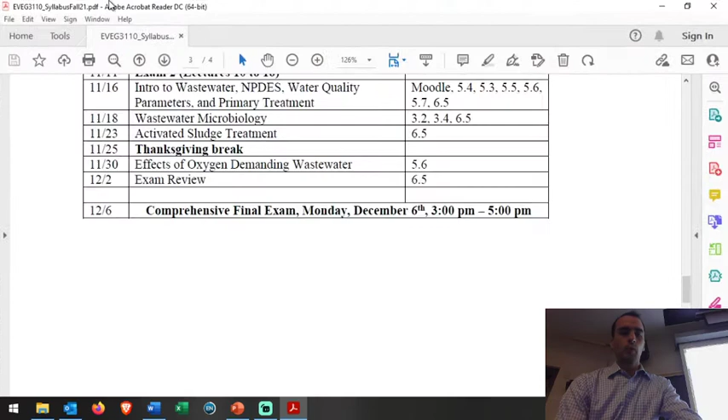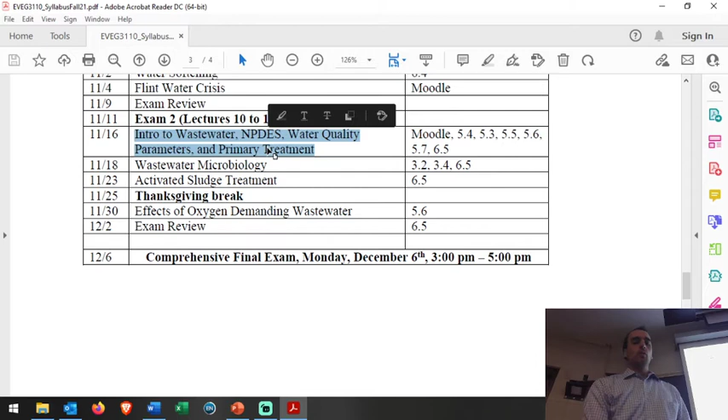My plan for the rest of the semester was to today really go through some of the regulatory framework. My history is I worked 6 months as a permit writer for Michigan's Department of Environmental Quality right after I finished graduate school, and so I have a little bit of experience to share with that regard, spice it up a little bit, I hope. And then we'll get into wastewater microbiology. You probably already have touched on that, and get into kind of the essentials of wastewater treatment driven by microbiology, and then talk about how biological oxygen demand goes.

That's my plan, and it matches reasonably well with what I've seen from the final exam. Like I said, I'm going to be trying to add and adapt a little bit as we go. Okay, any questions or concerns so far?

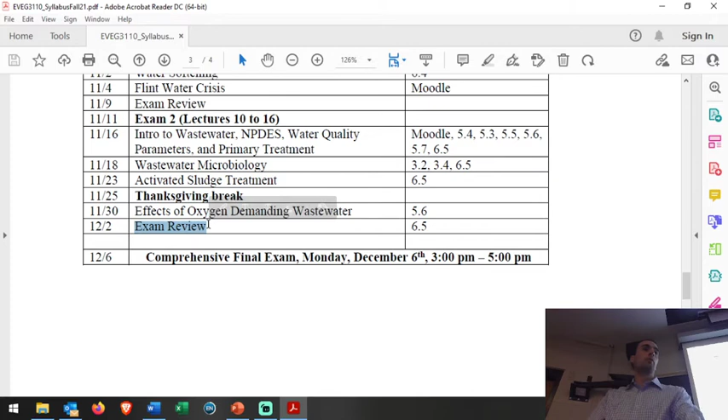We're going to have homeworks, right? So yes, I'll probably assign one homework, and that would be due. My plan generically would be to have it due this date and go over the solutions with you for that homework and answer any questions in prep for the exam.

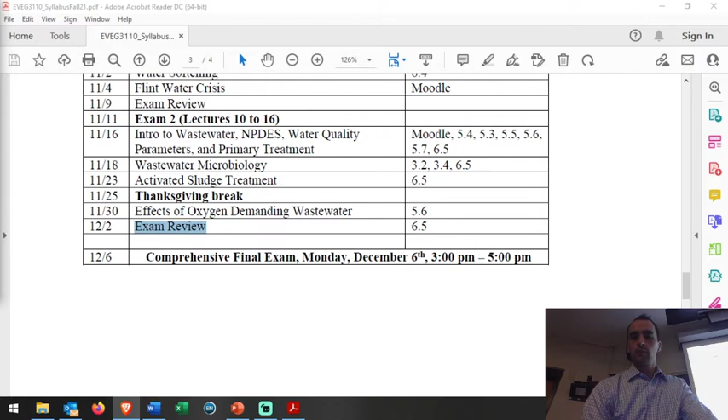So let me just show you real quick. We'll have a little bit of inception here. If you were to go to twitch.tv/snowslab, you'll see a few seconds delayed right here, okay? And so if you wanted to chat to me, I think you need to log in, but there should be a way to chat.

I'm not going to bother doing that, but if you do sign in, then you can chat to me. So if you stay out because you're sick, I'll be watching that, and I'll be able to answer questions you put live. I'll write that up on the board in a moment. It's twitch.tv/snowslab.

The lectures will stay there for about 10 days, I think. I do download those for my other classes and upload them to Moodle. Since I don't have Moodle yet, I'll probably just leave them there. So if you need them within 10 days, they'll be there. If I do get Moodle, or if you ask me, I can send you a link to basically the equivalent lecture in particular. But you can always go here within the past 10 days and find that. I'll probably write that somewhere else for you later if you need.

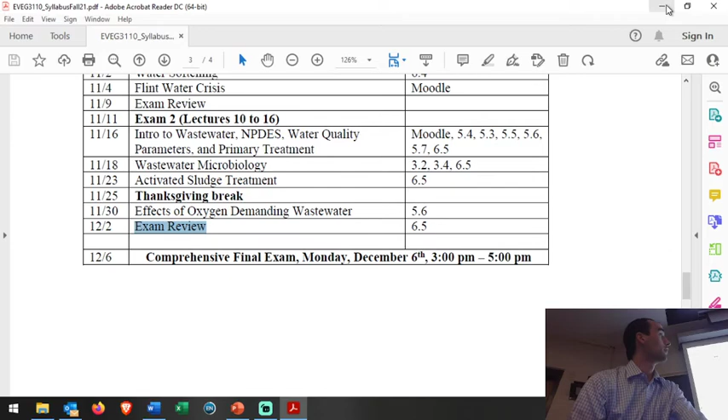Okay, so with that, that's kind of my approach here. Let me bring my screen back to myself. All right, any questions or concerns before we get started?

Were your notes, I'm not sure if it says, you uploaded or? If I get access to Moodle, I will definitely upload my annotated notes for you. What I'm going to do in class is I've got a little writing pad and pen, and I'll be writing on the pages. If I'm able to, I will definitely upload those for you.

If not, you can go to the Twitch page and you'll see the screen, right? You see the little webcam picture, that's where my face is going to be. I just put that there as a placeholder while I prepare my slides. Okay, so you'll have access to that. Any other questions, concerns?

All right, so we've probably talked a lot about disinfection at this point, I would assume. One of the things we can take a look at is the rate of typhoid fever in the US. Chlorination really started around 1910, though of course it wasn't implemented fully. And when we did begin chlorinating, that's going to help a lot with our food and waterborne disease.

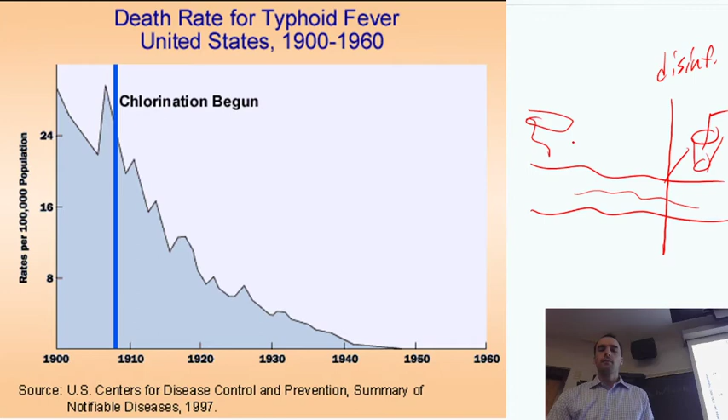The second barrier is for when we have, let's say, a poorly drawn toilet here, and flushing, and it escapes into the river, or wherever your water is. So the idea for wastewater is to have that second barrier. Disinfection may be the primary barrier, the water treatment, but the wastewater treatment is that second barrier. Ultimately, what we're trying to do is mitigate, prevent the fecal to oral route of transmission. If you haven't heard that term, it's pretty nasty, but essentially that's what's going on.

By the way, if you get pink eye, it's kind of the same deal. It's some sort of bacteria that likes to grow in warm-blooded animal guts or similar environments that's now growing in your eye. So maybe you went swimming and the water was kind of dirty, or something like that.

Antibiotics are typically what you need to clear out pink eye. That's kind of the deal. You don't want gut bacteria in the wrong place, right? And if you give it the opportunity and there's nutrients to grow, it may grow and be an infection if it's in the wrong place. Typhoid fever is the same deal. It's a pretty bad disease if you get it, but fortunately it's something we can deal with pretty well with proper engineering and infrastructure.

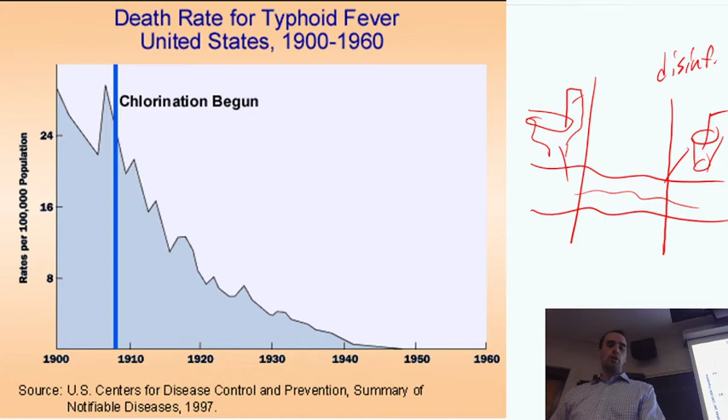So thinking about wastewater sources, we have industry and municipal, and the different types of toxins, the different types of contaminants we want to deal with really depend on where they're coming from. On the drinking water treatment side, you have to consider what source you're using. Then on the wastewater side, once you've sent that along through industry or homes, what kinds of wastewater are you dealing with? A lot of industries have wastewater nasty enough that they can't send it to a municipal treatment facility, or at least not without pre-treatment.

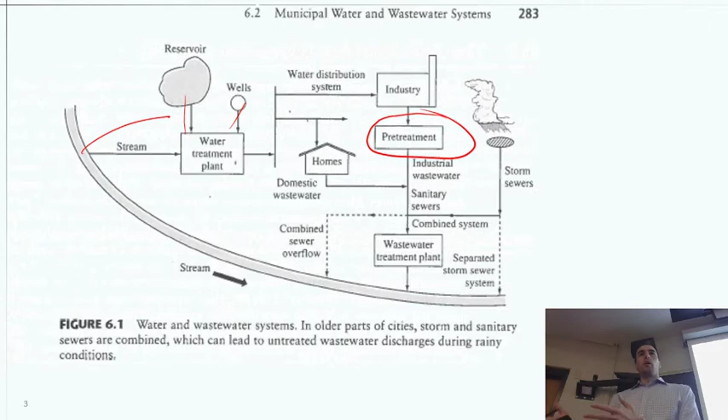Most wastewater treatment plants municipally are designed to handle the wastewater coming from homes. There's also an issue you may have heard of, storm and sanitary sewers. We didn't always separate our wastewater stream sewers from our stormwater sewers. Stormwater is a big important thing, we know it here very clearly in Louisiana. It storms a lot, we need a place for the water to go. A lot of municipalities, when building their infrastructure originally, just sent that down to the sewer system because it was kind of dirty water, and maybe that would be a good place for it to go. It's a bad idea because then you're going to flood all the wastewater back out if you have a bad storm flood event. So nowadays pretty much everybody's trying to separate their storm sewer systems, if they're not already separated.

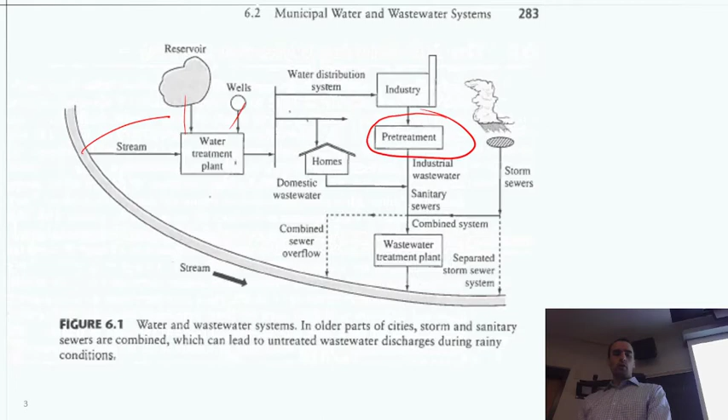Okay, so that's sort of the big picture schematic. Another big picture schematic for a typical treatment process - you probably touched on this already, and we'll go into more depth in a bit, so I'm going to breeze a little quicker through this. We've got primary treatment, which would essentially be the removal of the large debris, the grit, the stuff that might harm the plumbing, and whatever can settle in one session of a sedimentation chamber.

From there, we have secondary treatment, which comprises almost always some sort of bioreactor. So we employ biology, employ microbes to chew up the digestible stuff and make a lot of cells.

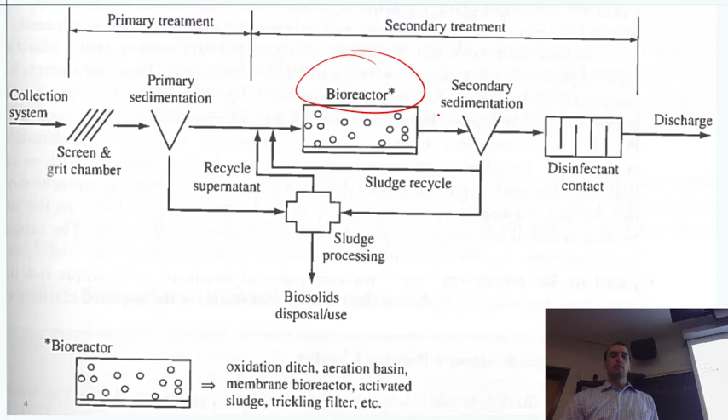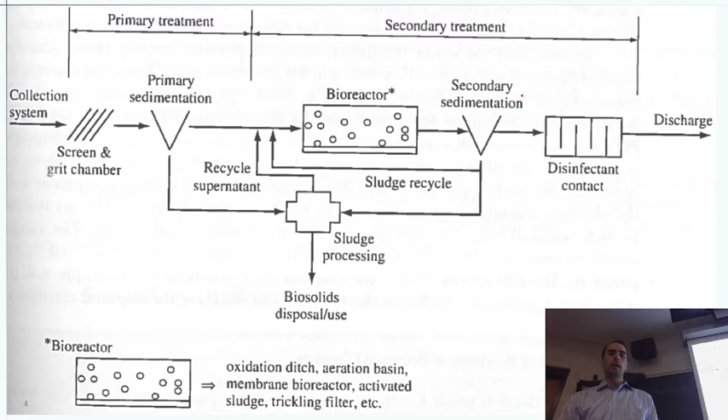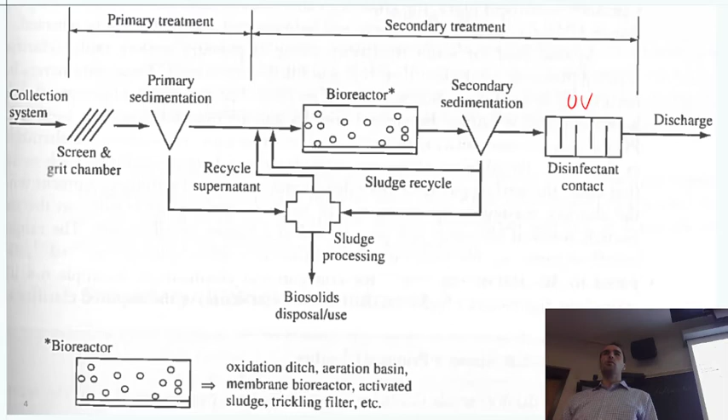Then we can separate the cells. That's going to be in sedimentation or potentially a membrane for a membrane bioreactor, or some other clever way to keep those bacteria in the bioreactor. So either we are recycling that sludge or using a membrane to keep it in. And then finally, we don't want to discharge all those bacteria into the wild, so we've got to disinfect it at that point. A lot of times that's going to be ultraviolet light. Sometimes it's chlorine, but then you have to remove the chlorine because you don't want to discharge chlorine into a river or wherever. So, lots to consider in that regard.

Part of all this is the sludge processing. Well, I say part of - it's not typically counted as secondary treatment. What we're talking about with secondary treatment is really the water component, but the solids that are produced in all of this are also important. It's a potentially beneficial resource. There's lots of nutrients bound up in those bacteria cells and all the other junk that accumulates. So if we treat it properly, there is an ability to use it as fertilizer. We call that application of biosolids.

There are different classes of biosolids based on what kind of processing they received, what temperature they achieved. We essentially let the biological activity in these sludge solids raise to a temperature where it's going to kill most of the pathogenic bacteria and organisms. There's still a few organisms that can tolerate the heat, and they'll just keep munching on stuff, and there's chemical reactions and all that. So there's a way to process them into higher quality biosolids that are safer to apply to land, and then we typically aren't going to apply them to a case where we're directly consuming that crop, right? It would have to be like a secondary crop or some other stipulation.

There's also some regulations about heavy metals accumulation. With wastewater, you're probably going to accumulate some heavy metals, and so they'll test the biosolids and then set some limit on how often you can apply them to a specific plot of land, and then at some limit you just can't apply them anymore.

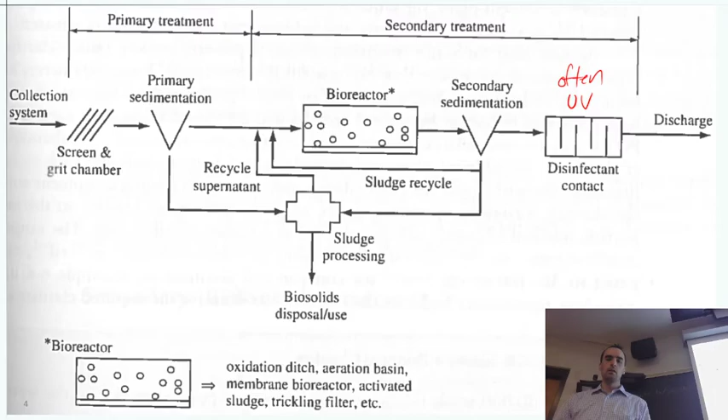Okay, so water quality standards - we often base them on the receiving water, and I'm going to talk primarily about discharge to surface water because that's where I have a bit of experience. There is also discharge to groundwater, a separate permitting system, with similar features in terms of why we care about it, what we want to make sure we're protecting, and all of that.

Okay, so a lot of times we're basing it on the fact that for the receiving water, we want to make sure that we're not harming any potential intended use for that water. So if you imagine a very beautiful river that's flowing through, clear water with lots of different biodiversity, lots of fish, lots of wildlife, you want to make sure that if you're going to discharge water there, you're not allowing for impairment of that water based on that wastewater discharge.

And so you can consider if you had wastewater that's not bad, just a little hot, maybe high temperature, maybe it's just got a little bit of sugars in it or something. If you think about discharging that into a very clean body of water, maybe you're okay if you're doing a gallon a day - maybe that's no problem at all, right? Dilution is going to help in that case. But if you try to do 10 million gallons per day into a small creek, you're creating a much larger creek by doing that - you're definitely impairing the system. So there's a lot that goes on both on the biological side - there's biologists that review the assimilative capacity of the river or the stream or whatever.

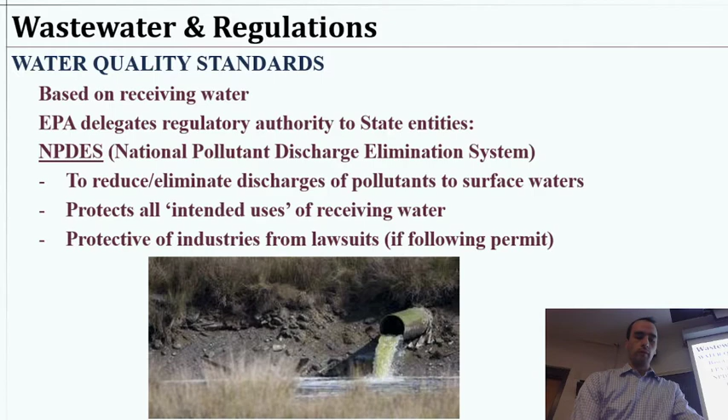Rather, the EPA takes that burden and says, okay, if you meet these standards, we'll give you a permit, then you're allowed. And so a lot of progress in terms of improving standards when they need to be improved has come from suing the EPA for not doing the job. So it's a strange world, but if an industry looks at the whole permitting system with a reasonable mindset, they should be glad for it, because it's a way to authorize them to do something that otherwise they'd have to prove in a court of law that they should be allowed to do.

Okay, so I think you've probably talked about the basics, so we'll go a little quickly through this. Conventional pollutants that wastewater treatment aims at removing would include biological oxygen demand, which is essentially microbe food. If you think about it, we undergo respiration by breathing in—we breathe in oxygen, some of that's converted to CO2, and we breathe out CO2.

Bacteria are going to do the same thing as they're eating, as they're metabolizing, as they're creating more microbes. Essentially, we quantify that amount of food with the term BOD, biological oxygen demand. This is a loose term that really categorizes any substance that allows bacteria to grow in that manner, and that bacteria will then demand oxygen from its surroundings by taking it in. So if you discharge water containing a lot of BOD substances into a pond, chances are bacteria will start growing really rapidly, the dissolved oxygen will be depleted, and you'll have a fish kill, or basically a very unpleasant situation with an anoxic pond.

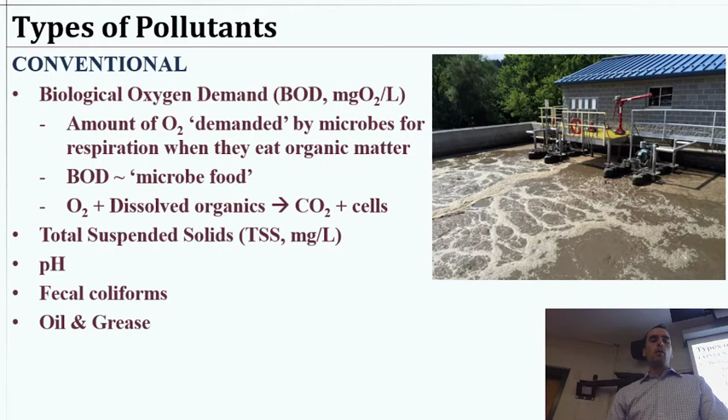And then oil and grease. Now, you might think to yourself, well, is there really a lot of oil and grease going to be discharged? I'll remind you that these are the conventional pollutants, and one of the conventional reasons we need wastewater treatment is because we started having our rivers catch on fire. A lot of people thought that might not have been the ideal situation. So here's the Cuyahoga River, I think back in the 50s, and the river's on fire, and there's a boat floating on the river also on fire. And you might think to yourself, well, how do you fight a fire on a river? If you take a bucket, you're not going to be too happy when you throw that bucket of greasy water onto the fire, right? Grease fires are no fun to begin with.

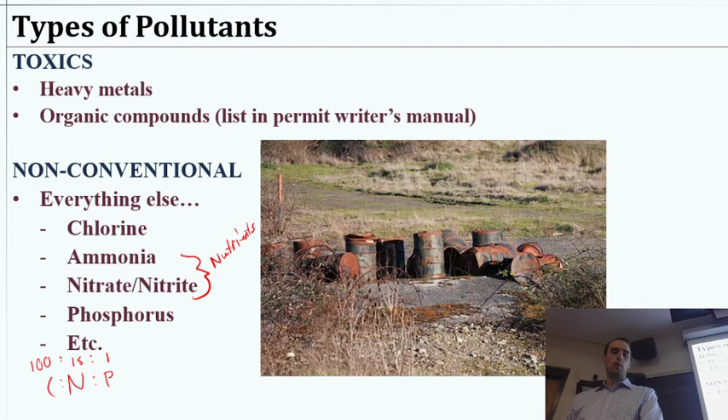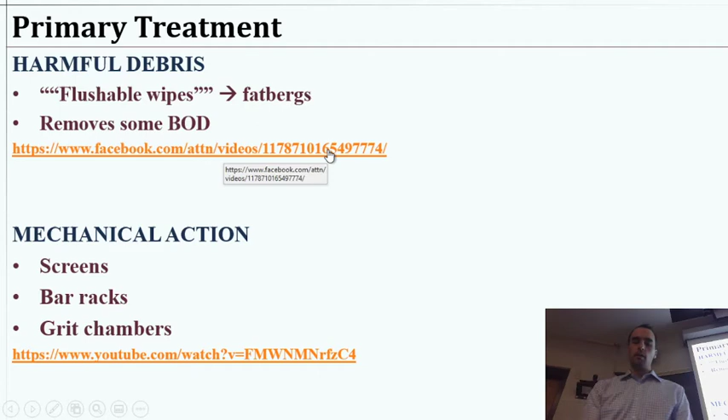Okay, another video I'd like to share on primary treatment. I think you guys have already covered primary treatment, but this is just a fun one. The reason we need to remove different particles and stuff from water is because we don't want it clogging the plumbing in our wastewater systems so that they can actually function properly.

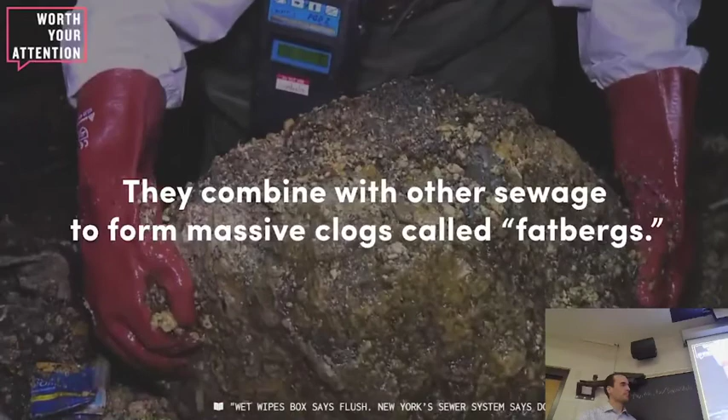So-called flushable wipes getting stuck in the sewer systems. I have never seen one dissolve. They have to remove them on a daily basis.

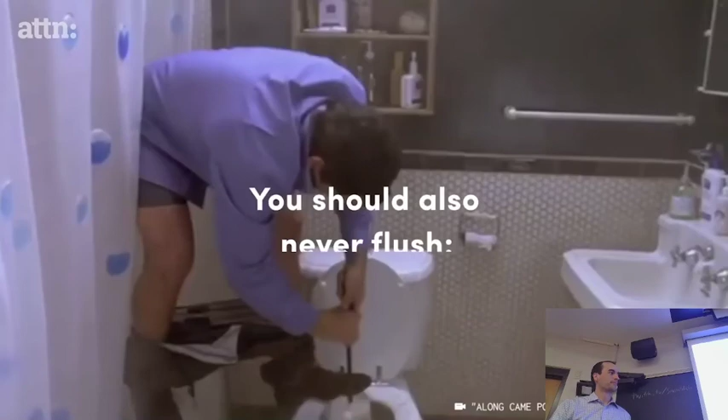Okay, so moral of the story: don't flush flushable wipes. They're not flushable, right? And quite a fatberg there. And who knew that fatberg was a word? So if you learn nothing, I've had people leave on my reviews: don't flush flushable wipes.

By the way, I don't even know who gets the reviews. I think Dr. Longo is no longer working here, so it's not super relevant to him. I think the reviews either go to him or to Dr. John Pardus, the environmental coordinator for our group. He might be the one associated with them, but I don't know the situation there. I'm just going to do my best for you. If you've got feedback for me, I'm happy to have it. If you've got feedback for the system, throw it into the review thing, or let us know—I'm not sure who that's going to be tagged to.

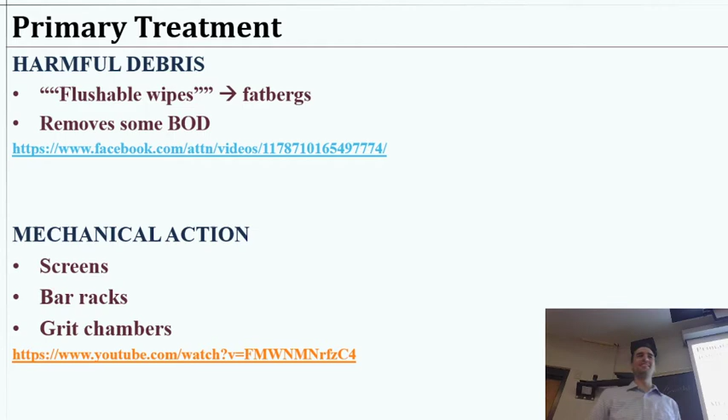Anyway, flushable wipes, not so flushable. Although I have to make fun of the guy for saying you'd never see it dissolve. What would it look like if it dissolved? Would you even see it if it dissolved? That was kind of silly.

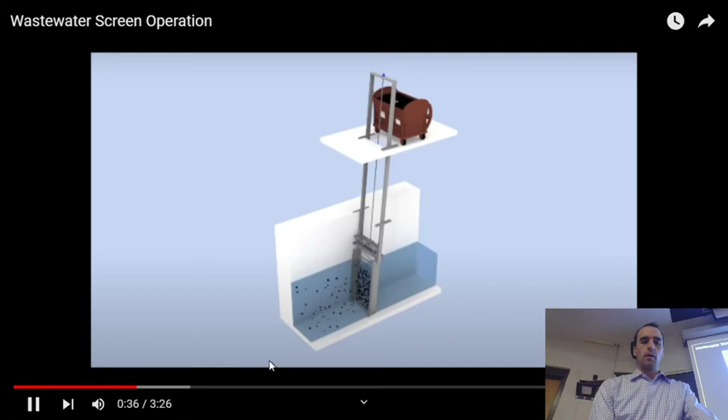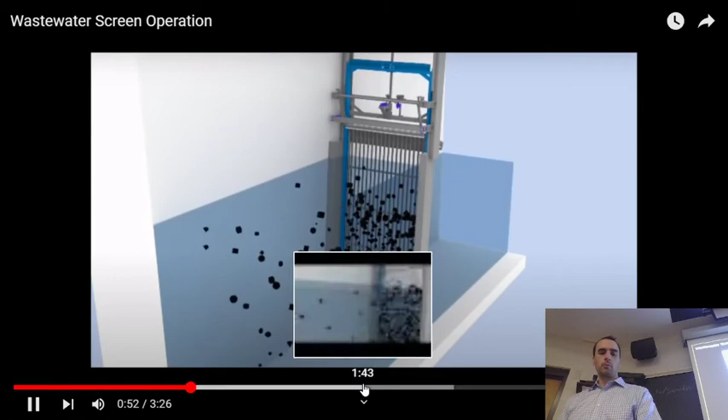Okay, got another little video here. It's just showing a screen bar rack in action. Not really a whole lot to look at, but we'll pull it up real quick. It's just a little mechanical automated system, an advertisement for their product I suppose, but you can see water flowing through and clogging up the bar rack. It's got an automated system to every so often scrape the debris, bring it up, and deposit it into a little bin, which it just did, and then it takes that bin up to a garbage collection system, and essentially you'd be landfilling it.

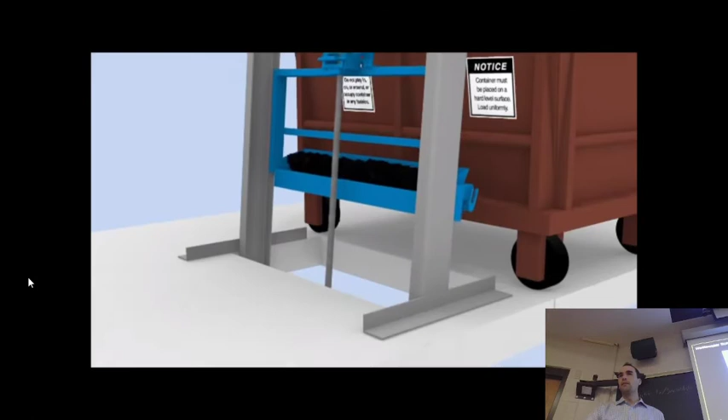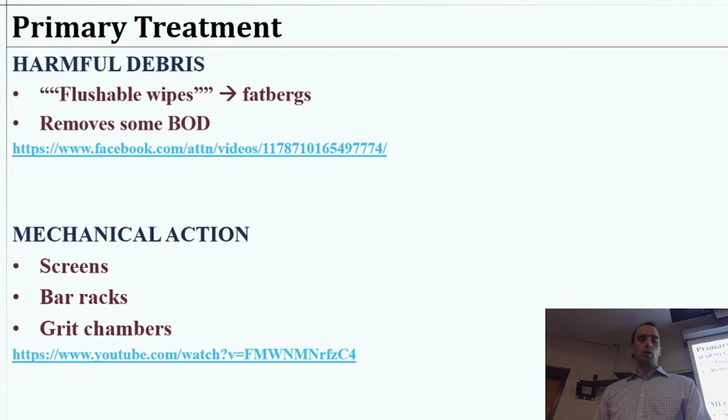You might dewater it. These particles caught in the bar rack probably don't need to be dewatered the same way a sludge would—maybe a little bit, but it's got such a light density that it's not going to matter so much. So that's the primary treatment, that kind of stuff, and then sedimentation—the first round of sedimentation, which you guys have covered. It's all essentially using gravity, simple separation, to pre-treat the wastewater.

Okay, so the next thing I wanted to do, and I need to pull this up, is talk you through a little bit about this wastewater permitting manual, because it has a bit of history and a bit more context here.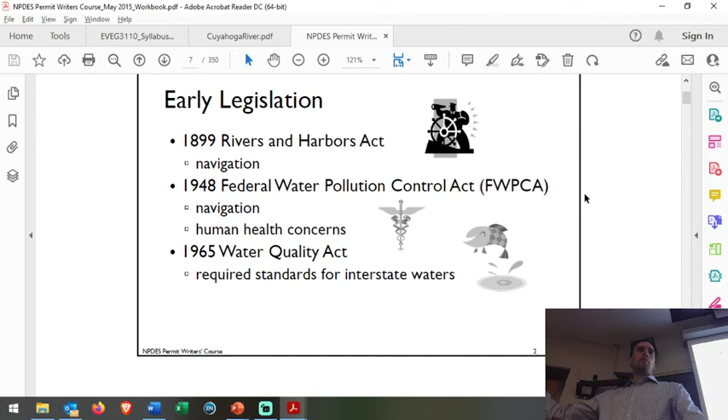1965 then is our Water Quality Act. This required standards for interstate waters. So that's kind of the first one that was dealing with, okay, this state is polluting and this state wants clean water - how do we deal with that? That's not fair. So the Cuyahoga River - 1952 is when that picture was taken of that fire.

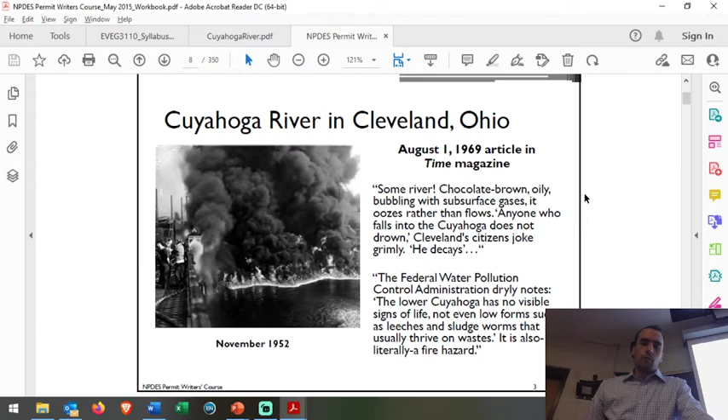In an article maybe 16, 17 years later, in Time magazine, here's the description: 'Some river, chocolate brown, oily, bubbling with subsurface gases. It oozes rather than flows. Anyone who falls into the Cuyahoga does not drown,' Cleveland's citizens joke grimly, 'he decays.' The Federal Water Pollution Control Administration dryly notes that the lower Cuyahoga has no visible signs of life, not even low forms such as leeches and sludge worms that usually thrive on wastes. It is also literally a fire hazard.

So not a good state back a little over 50 years ago. It kind of makes a lot of sense then why in the 1970s there was a lot of energy towards environmental protection, towards getting a handle on some of these things when our rivers were catching on fire and nobody was doing anything about it.

So the EPA was essentially instated in 1970 through an executive order, along with this Refuse Act permit program.

And if anybody's ever concerned about executive action and all the problems that this or that executive are doing - one good thing is a lot of times these get struck down and then remade through legislation, which is really the proper way. But it's a way that our country seems to direct action and then figure out the right way to do it and refine it along the way. It is unfortunate that it's not immediate in some ways, but it's probably best that it takes some revision, takes some time to get there in a careful manner.

So the EPA in 1970 was established, and this Refuse Act permit program in 1970, but that part was struck down in courts - it was found to be unlawful. So Congress began to fashion a new one. By 1972, the Federal Water Pollution Control Act amendments were put forward, and this essentially established the core of the NPDES program that we have today.

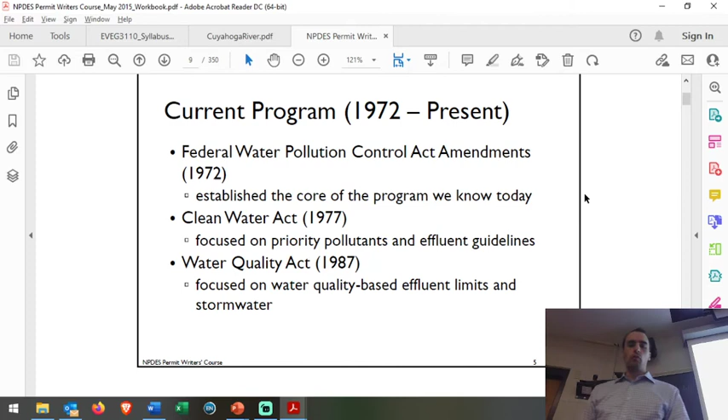Something like that. The Water Quality Act in 1987 focused a little more on water quality-based guidelines - what's the quality of the water that's receiving this, and how can we make sure that that water quality is preserved properly? It also introduced stormwater regulations as well.

And by the way, a lot of the oil and grease - a lot of industries that were doing some sort of industrial process were just discharging their oil and grease, and that's what was causing oil slicks on the rivers. It turns out once you tell them they must stop doing that, they'll find ways to catch it, and then they'll suddenly realize, oh, we can reuse a lot of that. Just have to clean it up a bit, then send it back through our process, and they save some money that way. So it wasn't all bad - it was actually a pretty good thing, a win-win for them to actually be cleaning up their waste.

1972, essentially the whole permitting program, this National Pollutant Discharge Elimination System, they wanted to restore and maintain the chemical, physical, and biological integrity of the nation's waters. So their goals and policies include, A, eliminate the discharge of pollutants.

Eliminate all of it by 1985. They really found that to be not ever quite practical. You could even consider the temperature of water to be a pollutant, by the way.

So a power plant generating power, whatever system they use, they're typically going to be using, from thermodynamics, the Carnot cycle. They're going to have a heat source and a cool source, right? They're going to be deriving energy from that. And so what they use as a cool source almost always is large volumes of water from a natural waterway.

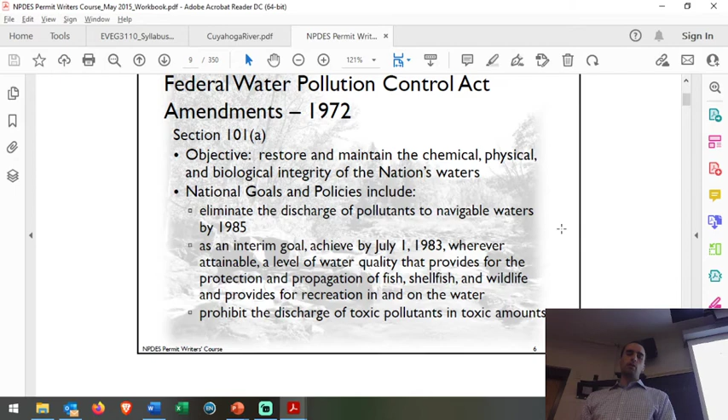Okay, so the interim goal, which is kind of what they have as a forever goal, I suppose, was they said to achieve, by July 1st, 1983, wherever attainable, a level of water quality that provides protection and propagation of fish, shellfish, and wildlife, and provides for recreation in and on the water.

That is intended uses. So we mentioned intended uses earlier. That's the scope of intended uses. Anything that we might want to use the water for safely, we should be able to do. Again, that's what certainly makes sense.

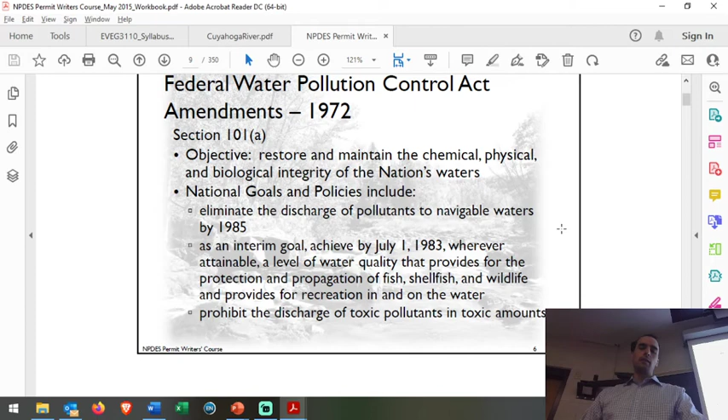They also are saying prohibit discharge of toxic pollutants in toxic amounts. In toxic amounts is important. Dose makes the poison. If you have something that is toxic in tens of grams and you discharge 10 nanograms, that shouldn't be a problem, right?

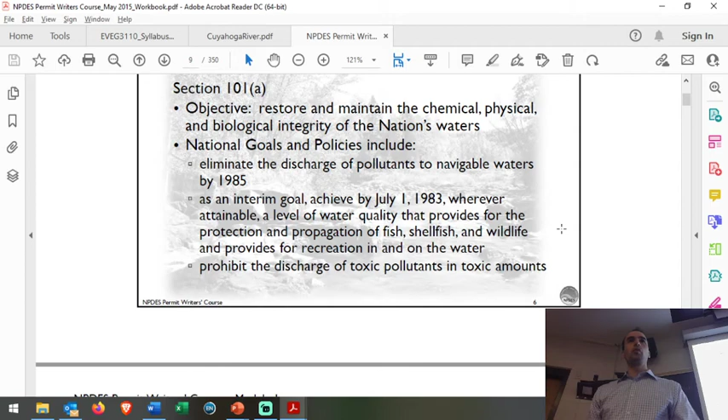For most cases. Okay, so some basics about this NPDES permit program. Again, the groundwater systems are very much parallel, but in this program you can have a maximum permit term of 5 years. So I dealt with a lot of very simple permits when I was learning the system. It was 2015 when I was working there.

And so a lot of stormwater discharge for, let's say, an auto repair shop. They have a lot of oil and grease in their processes, but it's not a major industrial effort. It's just they're changing oil and some of it spills, and they get oil and grease kind of everywhere in their work area. So they actually have to have a permit for the stormwater that's going to run off of their property. And so they have some basic treatment to capture some of the oil and grease in their drains, and they get permitted to do that.

So that's a very simple permit. They'll be reviewed in 5 years. They have to apply for it again, just check the boxes and make sure they have this stuff in order. A larger process, something more like an industrial, large-scale industrial system or a large water treatment plant, they're going to have to reapply every year and make sure that all their permits, all their stuff is in order accordingly.

There's, of course, compliance deadlines and all that. There are also, so a lot of times the way the permits go, is you're allowed to discharge up to this amount, or maybe a total amount of this per day or per amount of time.

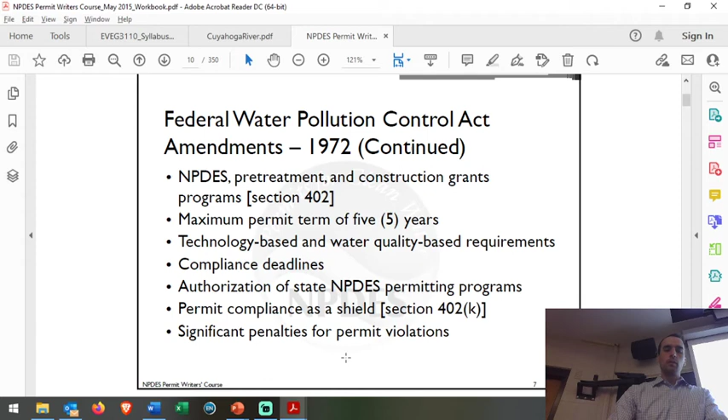I mentioned the permit compliance is a shield. In a sense, if you have the permit, you are allowed to do this that you would otherwise be disallowed to do. So in that sense, obviously there's going to be penalties, financial, and potentially permits rescinded for permit violations.

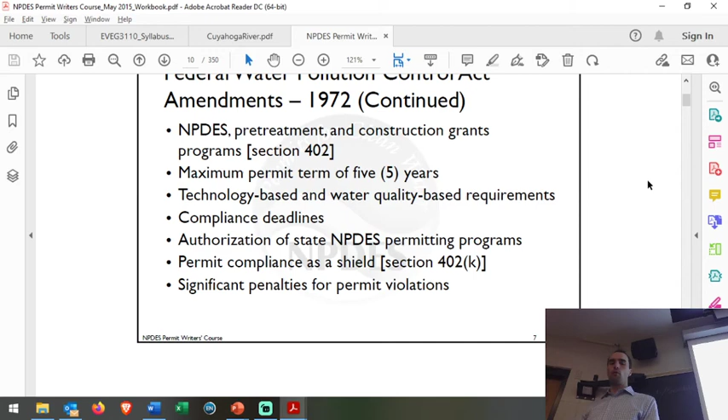Sometimes it's a case where a facility is doing everything they're supposed to be doing, trying their best, but it happened to receive a lot of rain that previous week, and that rain worked its way into the wastewater system, and they discharged and were out of bounds of their fecal coliform counts. If a case like that were to happen, the EPA or the NPDES governance isn't really interested in revoking the permit altogether for this municipality. They're more interested in saying, hey, this is not allowed, so probably a fee, but it's not something they're trying to revoke. It's not something the facility did on purpose, but it's something the facility needs to account for to avoid in the future.

In 1976, there were 65 categories of toxic pollutants, 129 pollutants identified in total. That list is updated, I think, every 5 to 7 years. It's reviewed to see if anything needs to be added as a priority pollutant. Certainly there are more toxic pollutants in the world than just those, but that catches pretty much all of the important industrial ones for the most part.

So there are 21 industries categorized based on the idea that this type of industry generally creates this type of waste, so therefore this type of technology is going to be appropriate. Some regulations are created so that instead of saying you can't discharge more than 10 micrograms per liter of this stuff, sometimes it's really hard or expensive to measure lead down below 10 micrograms per liter, but we want more removal than even that. So what we prescribe is: you must use this activated carbon system, or you must use an XYZ type of system as a technology, do it properly, and have the proper checks in place in order to satisfy this permit. So then they're prescribed some sort of technology that we know works. Of course, they have a little bit of freedom in how they design it, or have their consultants design it, but they have to meet the criteria for the permit. That would be a technology-based control.

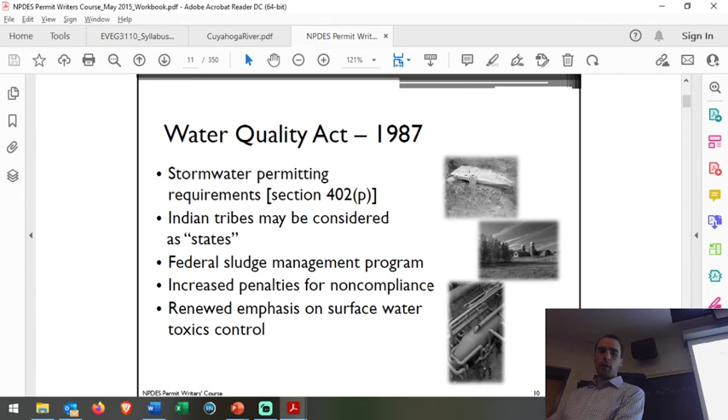The sludge management programs, that was added at that time as well.

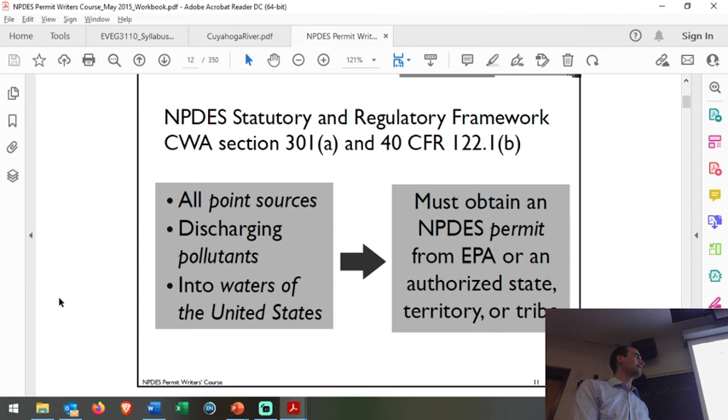In terms of the NPDES system, essentially any point source or any discharge that's going into waters of the U.S. is included there. And so waters of the U.S. is an important criteria. We talked about what a permit is, like a license.

So point sources are kind of the obvious ones — here's the end of a pipe leading out here.

A non-point source is less obvious. You can imagine something like an engineered wetland, for example. You have a specific plot of land that is your water treatment, and water is flowing out from that point or from that land area, that plot of area, across a boundary, I guess. That would be considered your discharge, and that would not be a point source in that manner.

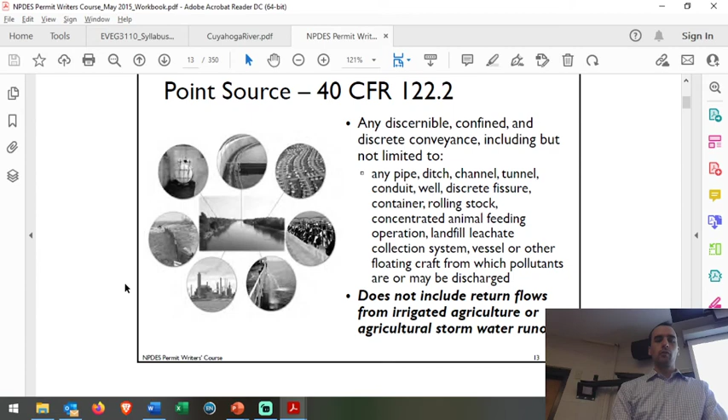Pollutants are described pretty broadly. One thing that's interesting here is that, in terms of the NPDES system, we exclude sewage from vessels or injected waste. Injected waste is handled by the groundwater system.

For vessels, if a ship comes into port in Louisiana, up the Mississippi, and they want to discharge their wastewater, they're not going through the NPDES system for authorization. They're going to be dealing with someone else, probably within the Department of Commerce, NOAA, for the management of whether or not they're allowed to and what criteria they have to meet to discharge any wastes. So it's a separate system there.

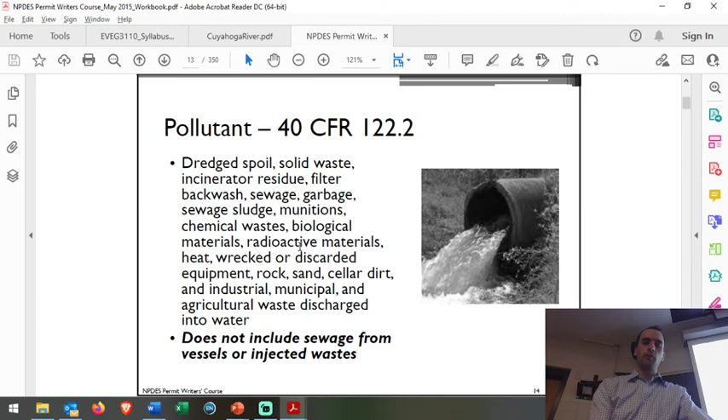We talked about conventional pollutants today. Waters of the U.S. — this is interesting. How do we define what a water of the United States is? For the most part, it's what you'd think it is, except you have to make an exception if you're using a lagoon, an artificial lagoon.

You create a pond for wastewater stabilization or treatment — kind of a rudimentary primary and secondary treatment strategy is just to make a big pond and let the water sit out there. There's a little bit of mixing from wind, a little bit of anaerobic process happening underneath where it gets anoxic, and a little bit of aerobic process happening on top. So it's actually a pretty good treatment option for low flows.

But do you call that waters of the U.S.? No — you're dumping wastewater into it on purpose, using it that way. But a pond that you artificially created for a neighborhood or something, you would call that waters of the U.S. So there's some distinction there — we have to specifically put a caveat in.

One of the other difficult ones for the system in general is irrigation ditches for agricultural land. On the one hand, there's a lot of nutrient runoff that unfortunately goes into our waters, essentially running off from agricultural land. Irrigation ditches are used to transmit water and potentially fertilizer to the crops, but then typically on the side of a plot of land, there's a ditch that will drain a lot of that out.

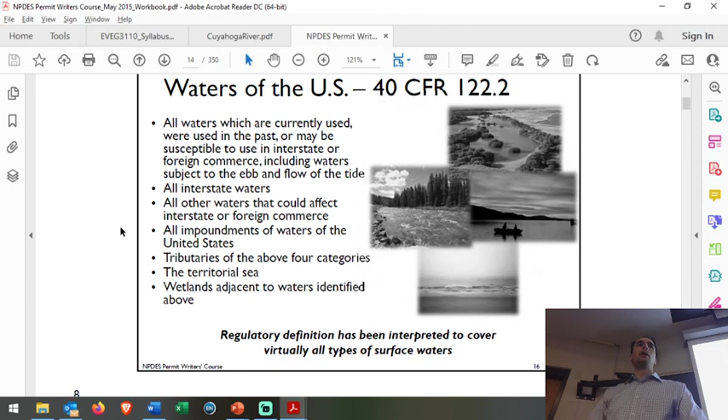A big environmental problem is that disposal, or that traveling of the nutrients away from the agriculture. It's a problem for the farmers too, because they wanted the nutrients to be taken up by the plants — they don't want the nutrients to escape. That's wasted money. It's also a problem for the waters receiving it.

Okay, there's been a few Supreme Court rulings. I mentioned earlier, sometimes you sue the EPA to make progress.

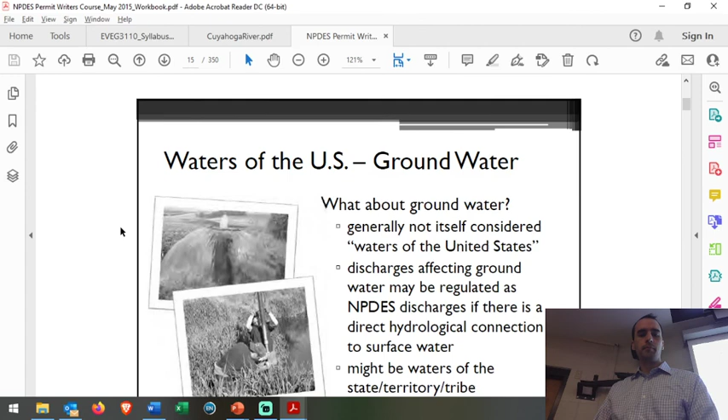It's a separate system for groundwater. It's typically exempted from waters of the U.S. in most cases. I mentioned the treatment lagoons.

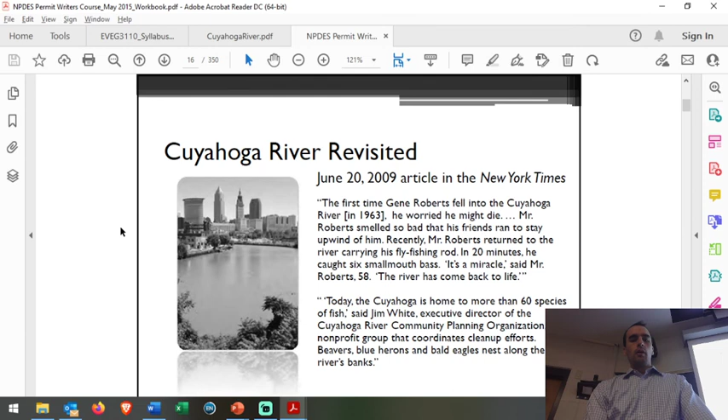So after implementing lots of good wastewater treatment policies and regulations, having them in place for some time, in June of 2009...

there's an article from the New York Times reading: 'The first time Gene Roberts fell into the Cuyahoga in 1963, he worried he might die. He smelled so bad that his friends ran to stay upwind of him. Recently, he returned to the river carrying his fly fishing rod. In 20 minutes, he caught 6 smallmouth bass. It's a miracle,' he said, at 58. 'The river has come back to life. And today, it's home of more than 60 species of fish. Beavers, blue herons, bald eagles nest along the river's banks.'

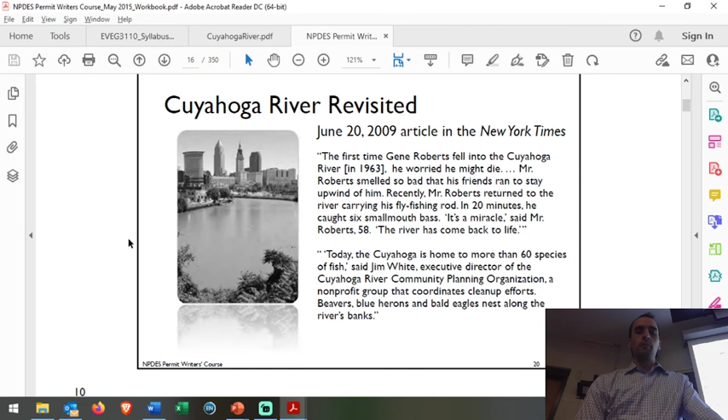By the way, smallmouth bass are particular. They like very clean water and lots of oxygen in the water. You're not really going to find them in lower oxygen water, so you'd be hard-pressed to find them in southern Louisiana, possibly in the rivers, but I think there's mostly other species of bass in the Amite and Comite.

Possibly northern Louisiana. Same is true in Georgia. I grew up in Georgia, and you can find smallmouth bass there, but generally you're hard-pressed to find them unless you're in North Georgia, fishing the clearer, smaller waters.

Just to wrap up, I want to show a couple of graphs here. This is 2015 data of different waterways that have been assessed for whether or not they are impaired. This font's way too small to read, and I take no blame for that because it's not my slides, but you can kind of see it. So these are assessed rivers and streams, and then the other one are lakes, reservoirs, and ponds.

If the dark color is impaired, there's a gray color we can't really see that says threatened, so a small fraction are threatened. The lighter of the two dark colors is good. So 45% of the rivers and streams and 32% of the lakes, reservoirs, and ponds are in good condition. All the others are pretty much impaired or threatened.

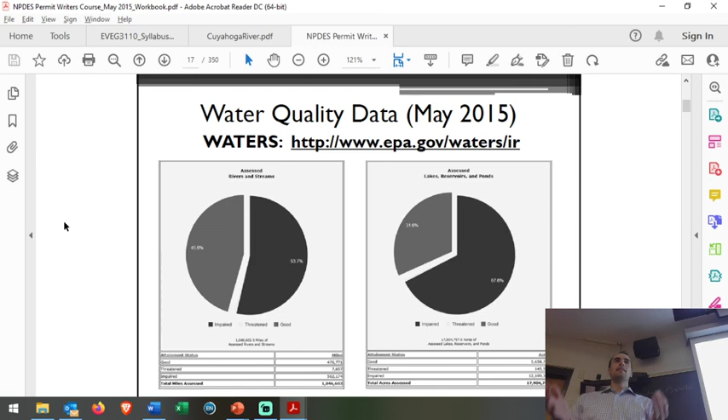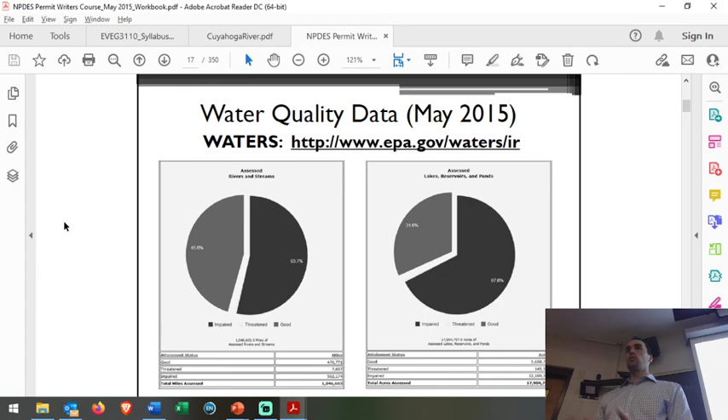Like I said, this could just be that there are too many bacteria counts when you measure, and maybe that's not the case all season long. Maybe that's natural causes, natural wildlife contributing to the bacteria, all that.

If we are discharging lots of phosphorus or something, lots of agriculture can contribute to nutrient contamination. Also, in some cases that might just be natural.

Mercury—funny case for mercury. While I was at Michigan's DEQ, there was lots of constant fighting about reducing mercury discharges, especially for municipal wastewater treatment. Some time ago, municipal wastewater treatment had a big issue with mercury coming from dentist operations, because they used amalgamations and then made gold fittings, and they had to use mercury in the process and all that.

They've since cleaned that up, and they capture their waste in that regard. However, they were blaming the wastewater discharges for all this mercury in their waterways when the coal-fired power plants were actually contributing a lot more, which was going up into the air and depositing from rain into the waterway. So if you did the math, the wastewater was contributing about 1% of the total mercury load going into these systems, and they were sort of pointing the blame in the wrong direction.